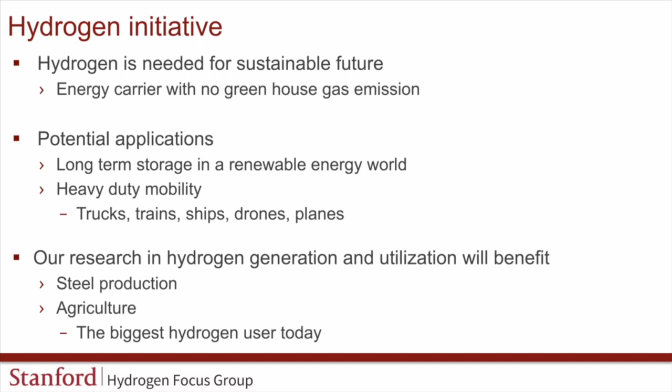While at Stanford we may not directly address these issues, we do believe both fields, steel production and agriculture, will benefit from many of our activities in the future.

Now, there's no question in a renewable world where the primary energy sources come from solar, wind, and other renewables, those renewables are for all practical purposes not dispatchable, which means you need to store the energy when it's available and use it when it's available to a lesser extent. We normally classify the storage needs based on the frequency response. How quickly do you have to respond to demands on the grid?

And there is a very high frequency regime, which can be in the vicinity of seconds, which probably can be met by batteries. There's a more intermediate frequency of hours and days, which can be done by thermal turbines. There are significant opportunities in that domain. And then as far as long-term storage, months, even years, I see in the green domain primarily hydrogen. Of course, not necessarily pure hydrogen, hydrogen in the form of several carriers.

Hydrogen may, in fact, be required to be transported from regions with lots of sun, where you have lots of solar energy cost effectively, to regions with lots of industry, and so potentially far less renewable energy available. And we will have to address the question, what are the best hydrogen carriers, whether it's metal hydrides, ammonia, hydrogen peroxide, or quite prominently synthetic fuels. There's a lot of research going on, and my colleague Tom Jaramillo is certainly a leader in this domain.

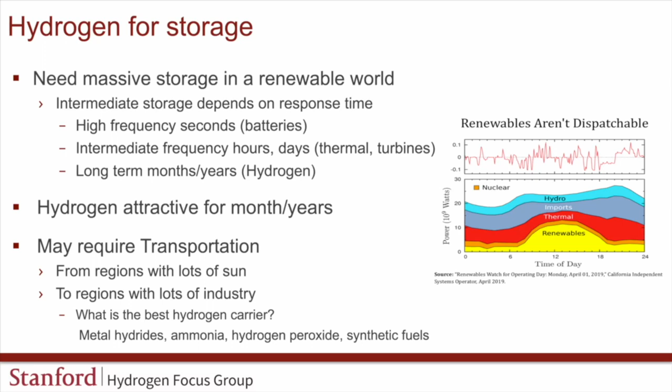Let me say a few words about the pros and the cons of hydrogen. Hydrogen is certainly environmentally friendly and has a fantastic gravimetric energy density, higher than many of the hydrocarbon fuels. The downside is hydrogen has a relatively low round trip efficiency.

And this is depicted in the right half of my slide, which came from NREL, a government lab, the National Renewable Energy Laboratory. And you can see that the round trip efficiency when you store the energy in batteries is significantly higher than the round trip efficiency of hydrogen, where you have to first electrolyze, make hydrogen, compress it, and then again utilize it in a fuel cell or oxidize it otherwise.

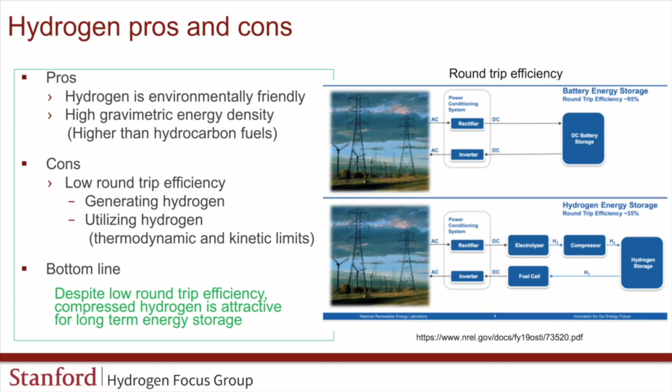But in all cases, there are significant efficiency losses associated with the usage of hydrogen, and batteries tend to be better. Despite all this, when you do the economics, despite the low round trip efficiency, compressed hydrogen is attractive for long-term energy storage. I'm talking primarily from an economic point of view. It is, compared to batteries, relatively attractive long-term storage.

Now, here are some of the differences between fuel cells and batteries, which I think is a good idea to briefly comment on. In contrast to a battery, a fuel cell is an open system where again it consists of a cathode, an electrolyte, and an anode. Hydrogen comes in on one side, at a porous anode, where we produce protons by taking away electrons, oxidizing the hydrogen, and the protons go through the electrolyte membrane, and then on the cathode side are recombined with oxygen to make water.

The electrons cannot go through the electrolyte and have to go on the outside, but this is an open system. As long as you feed hydrogen into the fuel cell, it will keep on running. This is not the case in a battery. A battery is a closed system. A battery will only have as much energy as you have in the active material, in the cathode material.

Again, a cathode, an electrolyte, and an anode. And the energy in the battery is limited by the cathode material available, as opposed to the open system, where as long as you feed hydrogen, you can keep on going.

Now, what's the case for hydrogen for mobility? And clearly there are many pros and cons, and this is an incomplete list and subject to a lot of discussion, so I can bring up a few arguments, but this is by no means complete. Again, the main benefit of hydrogen comes from its gravimetric energy density.

Hydrogen is good for long-term storage, including in mobile platforms. If you go very far and if you carry lots of load, there are some inherent advantages. Large tanks are possible, or you can also have many smaller ones. So it ultimately will depend on the economics, and there's a potential for very fast refueling.

The downside is you have a significant amount of system complexity, because every hydrogen system, every fuel cell system needs a significant battery. You need humidification, you need cooling, you need hydrogen tanks. That is one of the challenges which the fuel cell systems people need to address, to deal with the complexity of the many components required for making a mobile fuel cell system work. And another inherent disadvantage in hydrogen is the lack of existing infrastructure.

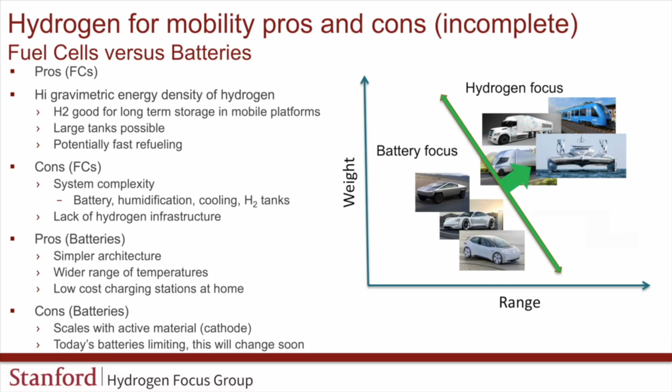So clearly there has been a momentum from the smaller to the larger, because the smaller one seems to be largely dominated by battery electric vehicles when you just look at the number of produced vehicles per year. But I think there's a significant opportunity for exploring hydrogen for heavy duty applications because of the inherent advantages of hydrogen. When you go long distances, heavy loads, substantial system weight, where you also may need and benefit from long storage times, that inherently favors hydrogen because of its high energy density.

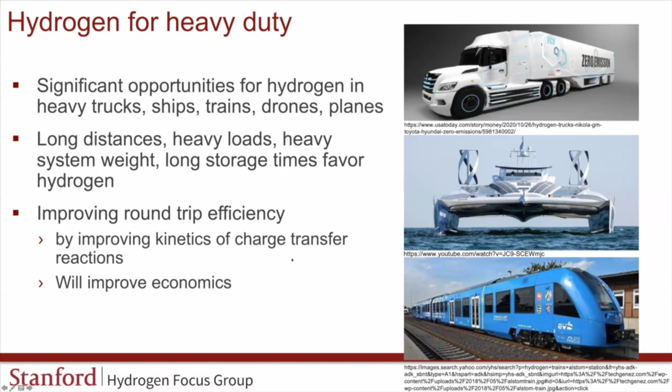The round-trip efficiency is a challenge for the scientific community to substantially improve. When you talk about round-trip efficiencies, there are thermodynamic limits and there are kinetic limits. The thermodynamics is normally set when you choose your material system and the overall configuration. There's not that much you can do on the thermodynamics. I always tell my students, do not fight thermodynamics, you'll lose, but there's a lot you can do regarding kinetics. You can enhance the catalysis in a significant way. You can shorten the transport of various species. There's a lot of opportunities, and that will have significant impact on the overall economics.

Now, what are the research themes which we intend to address in the future? As I just said, catalysis is a big one, and it also has a significant impact because it's a key cost item. Designing and synthesizing more efficient catalytic surface structures is important both for fuel cells as well as electrolyzers. We have a lot of opportunity to explore novel hydrogen carriers ranging from synthetic fuels to ammonia, hydrogen peroxide, metal hydrides.

We also need to address issues. Where are you going to transport hydrogen? If you do it in its pure form in metals, there are some challenges regarding hydrogen embrittlement, and there are also some opportunities for mitigating some of the challenges associated with hydrogen embrittlement.

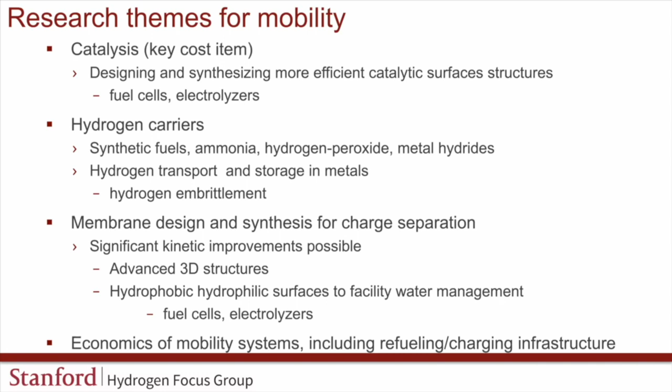There are significant opportunities to further enhance membrane design and realize next generation membranes for charge separation, both in fuel cells and in electrolyzers, taking advantage of certain 3D structures, surface treating, synthesizing or designing hydrophobic and hydrophilic surfaces to facilitate water management. These are all significant opportunities for improving the hydrogen systems and the fuel cell and electrolyzer systems as we know it today. That all will have significant impacts on the economics, but we also need to address the overall refueling infrastructure in the future.

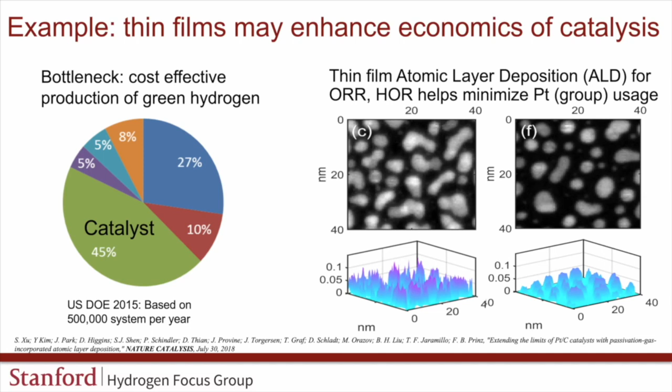And processes which were the domain of thin film production for microchips are entering now the energy domain in a significant way, both in batteries and in fuel cells. And we can make surface catalyst structures taking advantage of atomic layer deposition, substantially reducing the amount of material, yet getting the same catalytic benefits.

We're also studying by putting battery electric vehicles next to hydrogen electric vehicles and studying specific routes going from the west coast to the east coast or back, and then making the same renewable charging infrastructure, and evaluating what's the net present cost of the infrastructure which we need, and what's the net present cost of investing in the vehicles and investing in the actual operation to transport goods from one side of the coast to the other side of the coast.

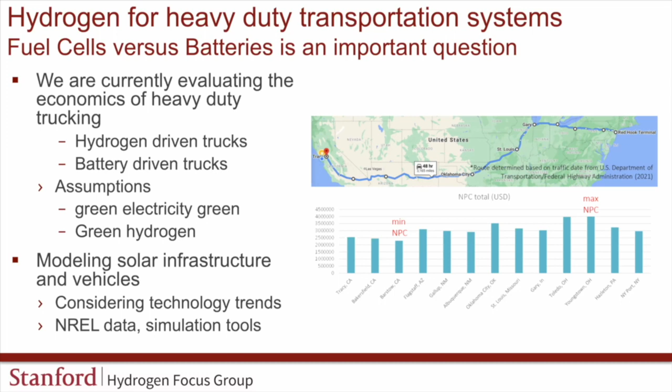We are benefiting from a number of data in NREL, and we have our first data available on the infrastructure, which is very interesting when you compare the battery infrastructure and the fuel cell infrastructure.

Finally, I would like to remark again that hydrogen has huge opportunities for steels, substantially reducing the CO2 emission. Steel accounts for almost 10% of the world's CO2 emission. And by switching to hydrogen systems, you can substantially reduce that CO2 emission. This will take time, and this is not cheap at this moment in time, but it may even have positive impacts on the quality of the steel. We still will need some form of methane, but there are significant opportunities for hydrogen in steel production.

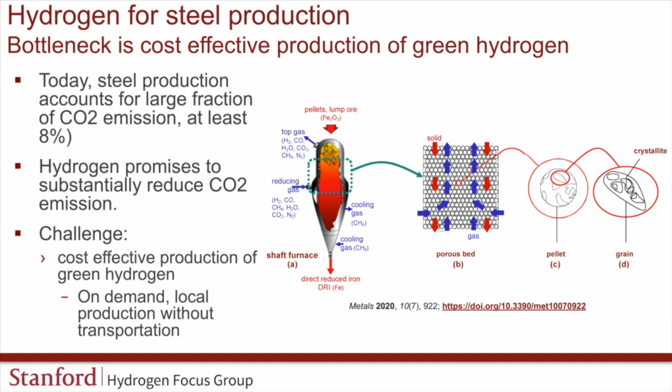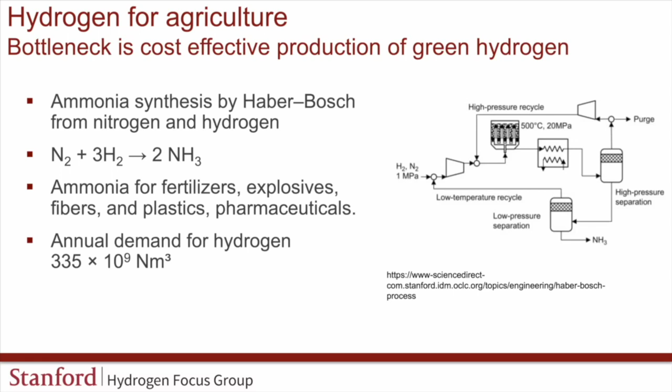Again, we need low cost, on demand hydrogen production. We need electrolyzers on a massive scale. And that's how our research will influence this domain as well. Same is true for fertilizer production, for agriculture. Reducing nitrogen is a major challenge. And that traditionally has been done with the Haber-Bosch process, which needs substantial amounts of hydrogen now and in the future. If you can make it in a green fashion, you contribute significantly to the environment.

So in summary, it all boils down to the cost-effective production and utilization of green hydrogen, which will enable long-term energy storage, but it will also create new opportunities for mobility, heavy trucks, trains, ships, planes, drones, and it will also benefit other domains, which we probably will not address primarily in our research at Stanford.

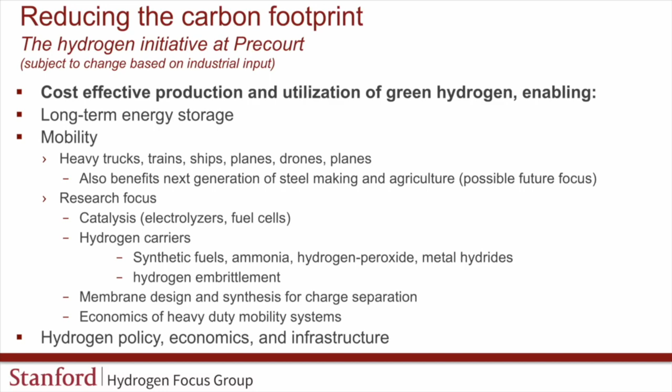And finally, I would like to point out that hydrogen policy, economics and infrastructure will be addressed in our new initiative in a significant way. Some of these themes and subjects will be discussed with our potential sponsors in the very near future, and many of the subjects obviously will be considered and reconsidered, and we invite our potential participants to have a lot of input on the future direction of our hydrogen initiative.

Thank you very much. We actually had a number of questions that were addressed to Professor Prinz. So the first question is regarding hydrogen fuel cells. Do you have any comments on direct burn in spark ignition of hydrogen, which, if you do that, you may significantly reduce the cost?

Yes, that's inherently an attractive idea. Let's just take the infrastructure of existing engines and oxidize hydrogen in the existing internal combustion engines. The downside is you're making the round trip efficiency even worse. Engines, especially mobile engines, have very limited efficiency. As you know, a small IC engine in a car, depending on whether it runs on gasoline or on diesel, has between 20 and 30% efficiency at best.

And so you're bringing the overall round trip efficiency further down, in contrast to a fuel cell, which has a more attractive scaling. Even when it's small, you can retain at least a 50% efficiency in energy conversion. Which means if you go to a smaller engine, you will need an even larger tank to get the same range based on the limited efficiency.